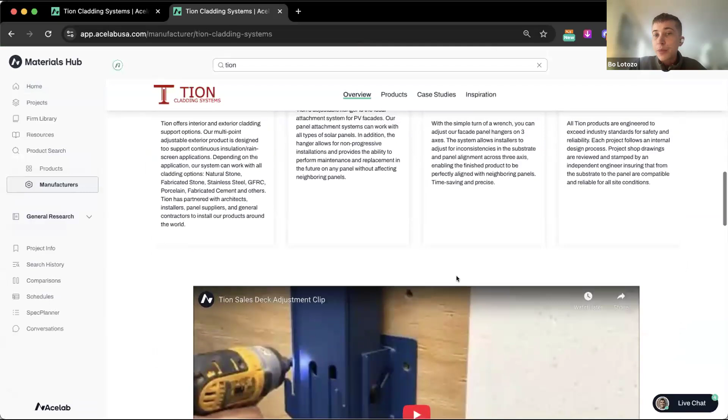You can get in touch with their team directly by clicking this contact button. You can scroll down to view some more information about their company, watch some installation videos, as well as view their products. You can save these to your firm library on Acelab, to any of your projects on Acelab, so that you can come back and reference that information later. And you can open up these product pages to access downloads, product literature, all of that good stuff.

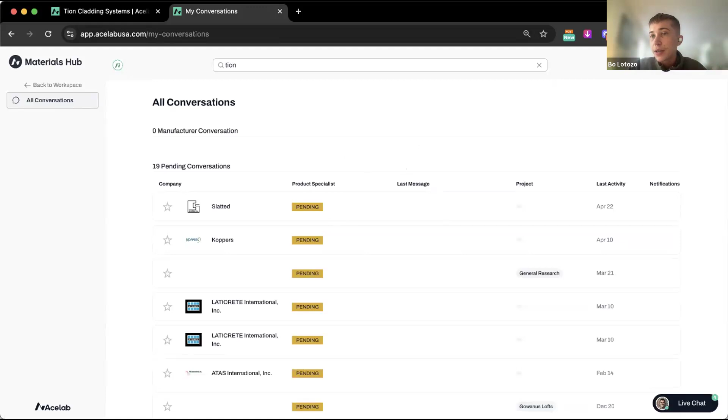You're also going to get an email about any new conversations that are started. You can navigate to this page directly from that email as well. But just in case you're logging into Acelab and want to take a look at an overview of all your conversations, this little button in the top right here is always going to take you to your conversation tab.

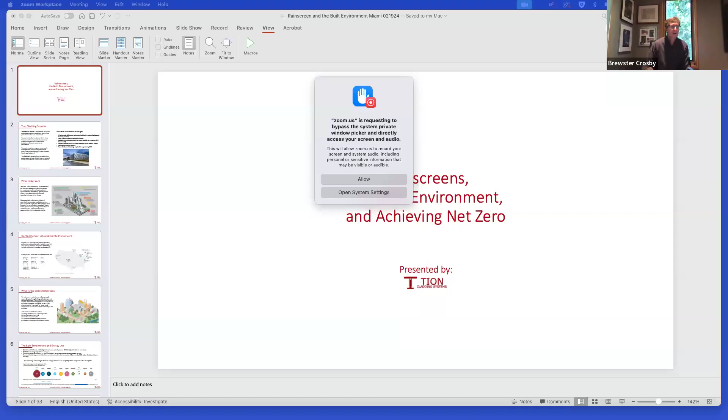All right. Let me know if you can see everything here. We can see everything. You might just want to pop it into presentation mode. Yeah, here we go.

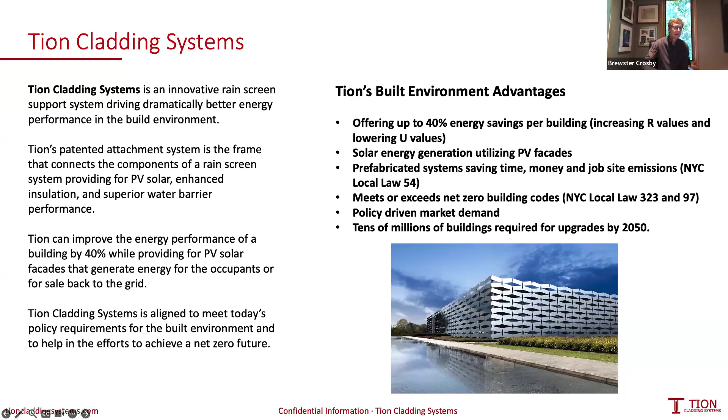So what is net zero? I'm sure by now almost everyone knows, but net zero is really the goal of balancing the inputs and outputs of our environment. In this particular instance, it's in the built environment - effectively getting our cities to be zero carbon and emit zero carbon. If it takes in carbon, we're trying to have offsets, so the net is actually zero carbon out into our environment.

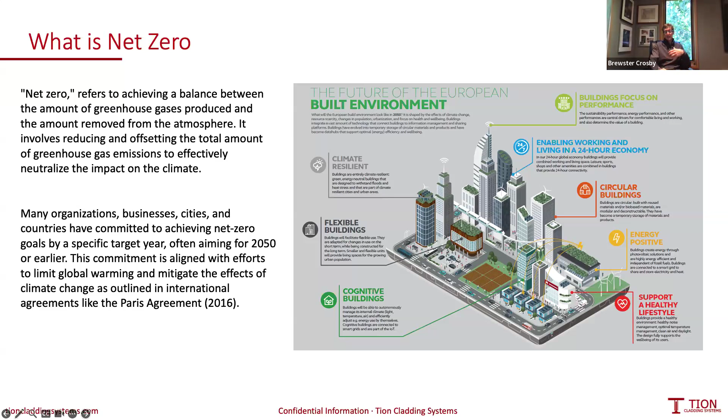Many organizations, building owners, cities, counties, states, countries have all signed on to this. It was really developed in 2016 as part of the Paris Agreement. The United States has been on and off again with this, but the good news is at the state level and at the city level, we're seeing really strong commitment from key cities and key leaders and key states in the United States.

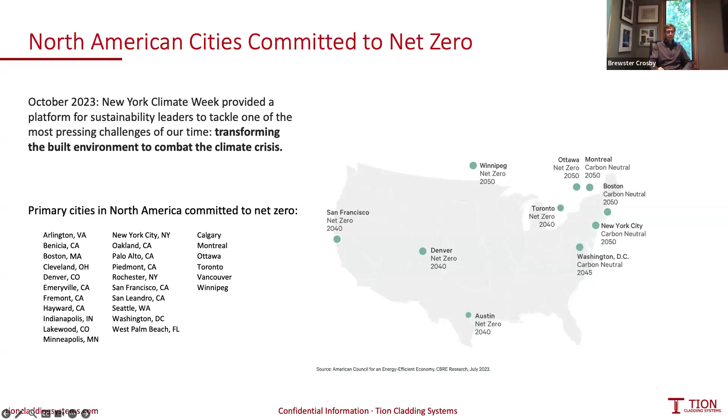Many of you probably already know what the built environment is, but achieving net zero in the built environment is saying we need our cities, our transportation, and all the surroundings that are quote unquote human made to achieve zero emissions. So factories, buildings, towers, parks, trains, planes, automobiles - all those are the built environment. And the net zero goals are trying to get all those to achieve zero emissions.

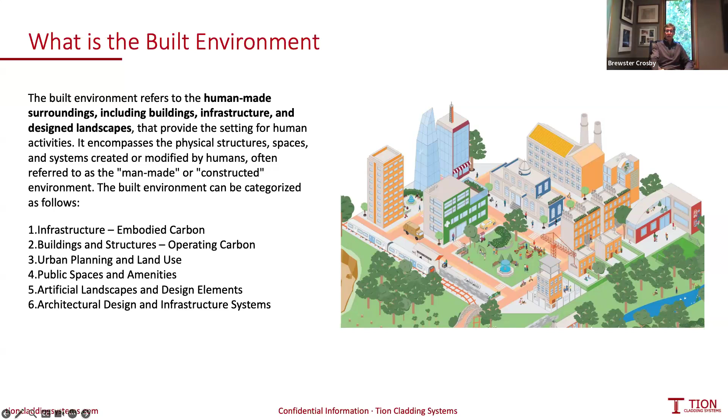So it's a colossal task across the spectrum, but also just within the cities and how it relates to buildings. If you look at just businesses, federal, state, and local governments, they own or use 93 billion square feet of real estate in the United States, and that's about 190 billion in energy expenditures a year. So we're talking a significant amount of volume and a significant expense in what our buildings use to function. It's about 35% of all energy consumed in the US, and about 16% of our emissions as a country on a whole. So the footprint of the built environment is actually pretty substantial when you think about all the outputs.

The interesting thing is when you actually look at how a building functions, a good hunk of it, about 40%, actually relates to the building envelope - that's the heating, the cooling, and the ventilation. These are all things that are relatively manageable in an existing building or a new building you create, just by products on the market today and retrofits.

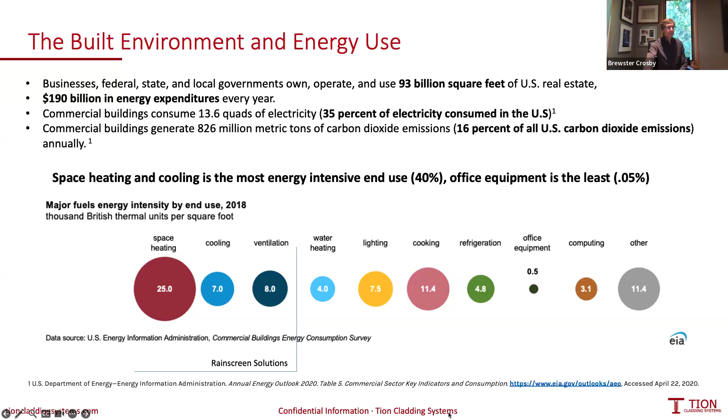So how do you achieve net zero in the built environment? There's a whole bunch of things people and cities and states can do. Of course, not everyone's going to do the entire list. People are going to mix and match for what makes sense for them, both for their part of the built environment.

Whether it's a building or a park, or their economics. The main thing, obviously, is to decarbonize the energy sources, shifting from coal and gas to cleaner energy sources like wind and solar. That is a big one. Part of the challenge there that cities are finding is that they don't have the footprint to do wind and solar within the city, so we're looking at ways to help cities actually generate electricity within their footprint.

Building efficiency, so updating your buildings and hitting new codes that have been implemented so that all the buildings, existing and future, are much more efficient. Sustainable transportation, we hear a lot about this, and many of us do this already, from biking and walking to using electric cars. All this helps reduce the carbon needed for us just to go about our daily lives.

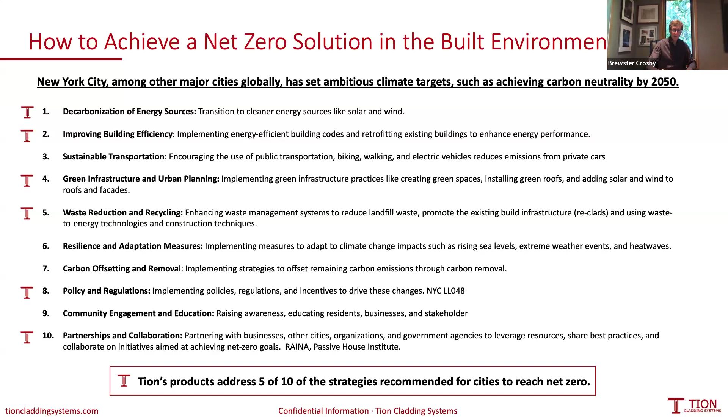And then, of course, partnerships and collaboration is very important across multiple agencies, cross-discipline in cities and governments, to other types of organizations like RAINA, which is the Rainscreen Association in North America, and the Passive House Institute. Organizations like this are really helping drive the conversation and provide the tools needed for people both on the design side and on the construction side to help achieve net zero goals.

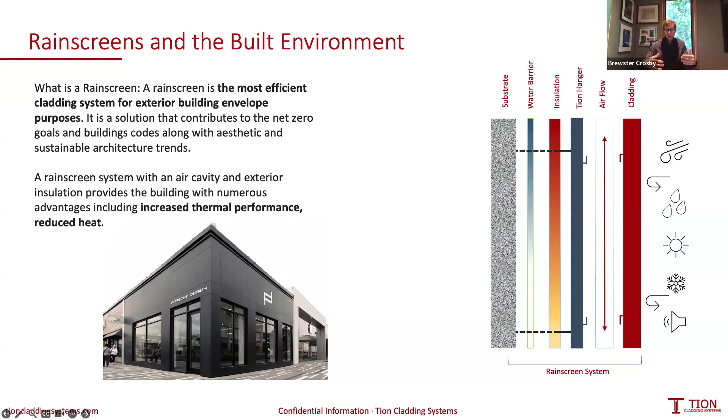Quickly, the rainscreen is probably the most efficient cladding system out there to help achieve better energy performance. It really increases both the warmth of the building, and also how air moves in and out or through the spaces of a building.

The components of a rainscreen are relatively simple. Of course, you have the substrate, which is the load-bearing frame, typically the side of a building. You have a water barrier that provides waterproofing, so no water can penetrate into the building. Insulation typically sits outside the water barrier, and then you have an attachment system.

The attachment system is actually relatively important. There's many different types of attachment systems. There's the typical lattice system that you would see, where you see verticals and horizontals. Tion actually uses more of a vertical system, which allows for more airflow to go through the air cavity

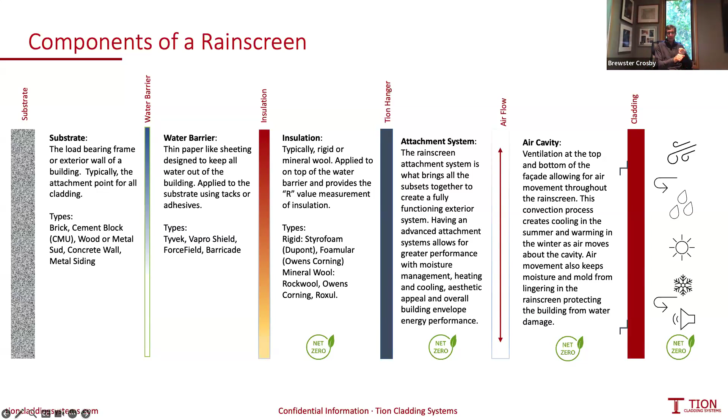that sits outside the attachment system before you get to the cladding system. This airflow is really important because it allows the exterior of the building to breathe, and hot air moves through the exterior envelope of the building and out, as opposed to trying to penetrate into the building. And it's the reverse in winter. And then, of course, you get the benefits of your exterior cladding, which provides all the environmental benefits and protections to your building, along with noise and other features.

The advantages of a rainscreen, really, if you think about wearing a down coat like many of us do, is an increased R value and U value. The R value is effectively putting more feathers into your coat to keep your building more warm. The U value is having a stronger exterior shell, the nylon shell, to keep the weather from penetrating into your body. And so a really good rainscreen is going to increase your insulation and decrease the ability for wind and other factors to penetrate the building.

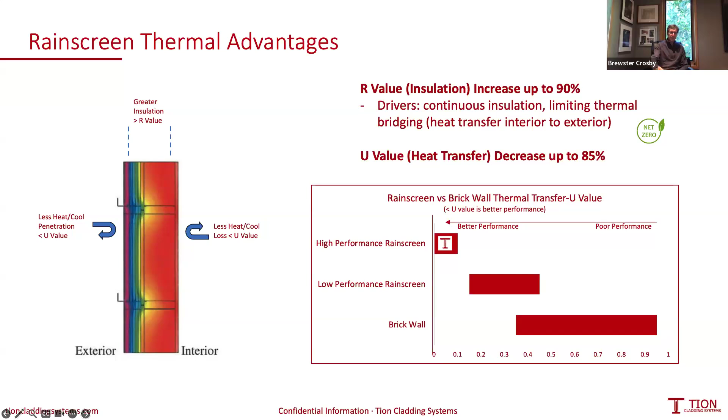So you get the benefits of both energy efficiencies in a building with a strong rainscreen.

But the savings are real. If you can save 30 to 40% on an energy bill through your upgrades, it's pretty substantial for a building owner.

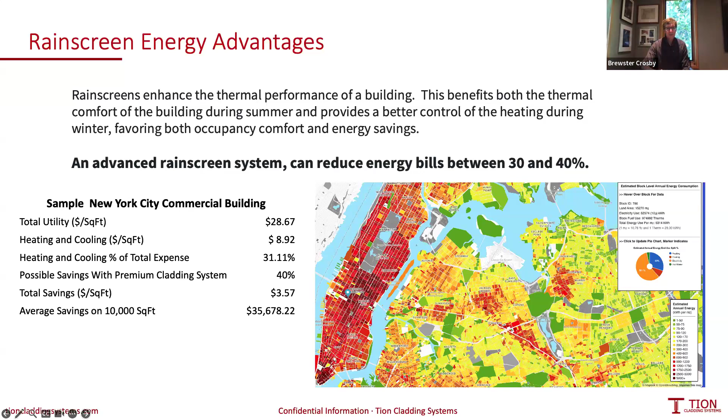The other nice thing about a rainscreen and cladding is it allows, from a design perspective, to add color, add texture, do quite a bit of fun design things to really freshen up a building or create new design features. We're seeing so much advancement on the panel side, the cladding side of facades, both in the materials that are now available, the colors that are available, the ability to really have strong UV performance, strong rain and environmental performance is increasing all the time, and it's just fascinating to see how advanced a lot of these panel companies are getting with the materials they're able to provide.

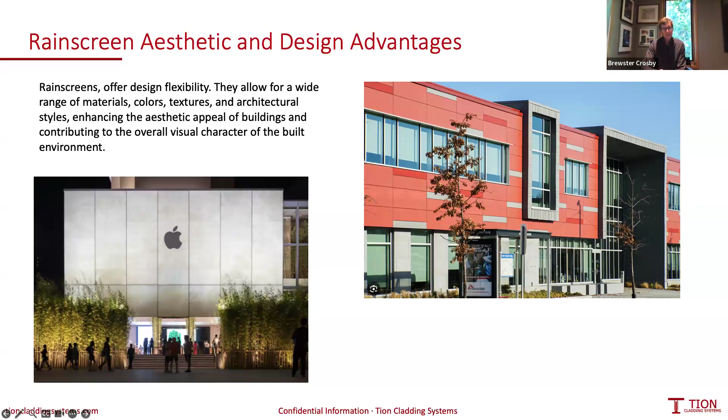I touched on it a little bit earlier about the importance of actually reusing existing buildings, because if you look at an existing building, there is all that captured carbon in there already. If you tear it down, you lose all that, and you have to create a bunch of more carbon to build something new. And so what we see here is, just by simply recladding a building and putting a rainscreen

on the exterior, in this case of a brick building, you can get all those benefits of a cladding system, of a rainscreen system. So you're going to see your R value goes up. You're going to see your U values go down. You're going to see better waterproofing.

The other ways people are really focused on upgrading their buildings, obviously, are the other heat loss areas, which are the windows and doors. And then they're upgrading their HVAC systems too to provide more efficiency in the interior circulation of a building. But really, for a square foot perspective, a reclad is one of the best ways to update your building.

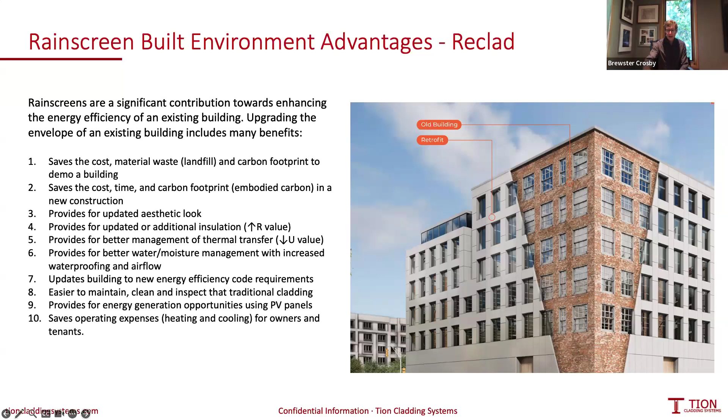We see this more and more in Europe, and it's starting to happen a little bit more in the US, where people are experimenting, and Tion is doing this as well, with putting solar panels on the side of a building as the cladding component. And the really interesting thing about this approach is, one, you get all the energy saving benefits of a rainscreen, so 30-40% savings to the building, but then you also get energy generation.

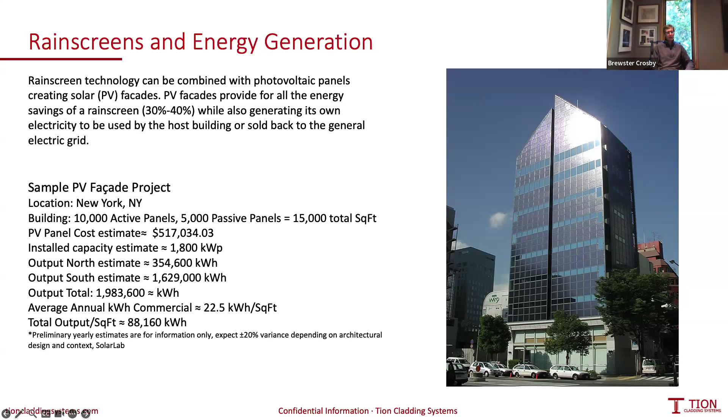And so that allows both the building owner to have a revenue stream, but also if you look at the footprint of a city, suddenly you have more real estate and more vertical aspect to generate renewables, as opposed to pulling carbon energy from faraway sources, whether that's coal or gas or what have you.

The cities around North America are really focused on this. New York has been one of the leading cities on the drive towards net zero. Their goal is to do it by 2050, which tends to be about what most cities are driving towards. But the task is huge.

So New York has set a series of laws in place to both use a carrot and stick approach with their building owners. They're giving them time to update their buildings, but if they don't, they have to start to pay more, and the fines they end up paying will increase each year they're late, until 2050. But if you just look at New York alone, there's over 1 million buildings that need to be upgraded or retrofitted.

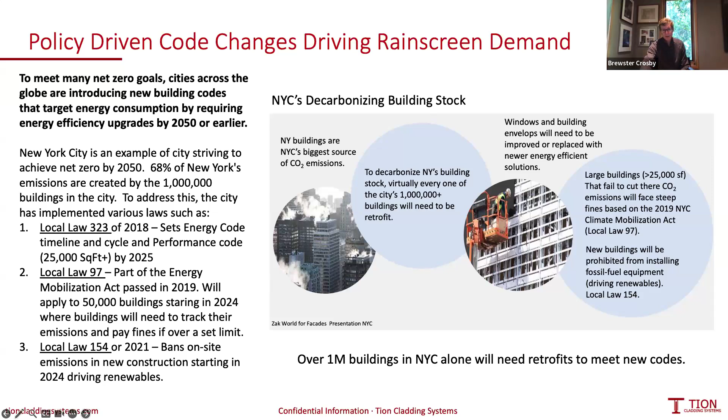As I touched on, you can do this through a whole host of ways. Updating windows and doors is important. Updating your HVAC system is important, but also doing a rewrap and updating your facade will really help you achieve those goals. New York really is a leader here, but Boston's followed, Chicago's followed, a lot of West Coast cities have followed, and all the way into Canada. So we're really talking millions upon millions of buildings that need the support to achieve these goals.

So in closing on the net zero side, and passing over to Ben to talk a little more about Tion, what a high-end rainscreen system does, such as Tion's system, is really connect all the dots. Tion works with all substrates. We're designed to have minimum water penetrations to keep waterproofing of a building as strong and as good as it can be. Most systems work with various depths of insulation. Tion will go out to 12 inches of exterior insulation, which is needed in parts of Canada and even parts of the US.

We can span deck to deck too. A lot of systems go from stud to stud. Our system does that, but we can also go deck to deck in 10 to 12 foot spans, which is helpful for some reclads depending on the building and how it's been structured from years ago.

We manufacture everything off site. So our product shows up in one piece, designed for a specific location on the building, designed for a specific panel to match up with. And that really saves a lot of the carbon intensive part of a job site. If you think about it, every day someone has to drive to the job site. If you think about all the time someone goes up and down on a lift to put in a lattice system, all that is creating carbon, and that's part of the carbon cost of doing a building. So if you're able to reduce that by sending completed products to the job site, you're actually lowering the carbon inputs into both a reclad and a new build.

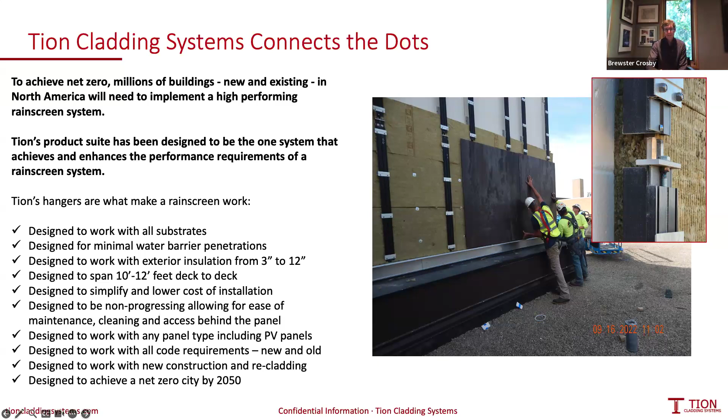Let's see here, you guys see my screen okay? Yep, yep, good. Awesome.

So a little background on Tion, kind of where we came from, how we got to where we are today. We really started out of a relationship with Apple years ago, working on a lot of their stores around the world. They were primarily utilizing GFRC and quartz panels on a lot of their interior and exterior cladding. What they were utilizing was, like still a lot of people out there today, some sort of a cleat or Z-clip or French cleat on the back of the panel. Then there's something on the wall corresponding, and you put the panel on.

If it's not right, you take it off, you shim it, you mess with it, and it can take a while. So what we came up with was a way to actually adjust those panels up, down, in, out, any which way you want while they're on the wall. Not only does that significantly cut into the installation timeline, but it also allows for perfection with the aesthetic appeal of the finished product.

So your joints are perfect, your panels are all perfectly in line. And I think from an architectural standpoint, it's obviously the desired effect, right? You want everything to look perfect, like you drew it up on the computer. So that's kind of where we came from, and I'll get into a little bit more of the specifics here.

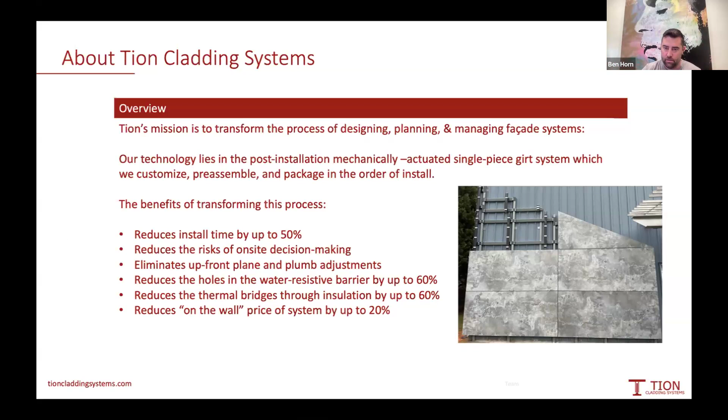But there's several other ancillary benefits of our system too, with regard to the fact that we can space our hangers out so far. There's fewer penetrations through other kind of weather barrier, and our thermal performance is much better. So yeah, there's several reasons as to why, from a design standpoint, our system makes a heck of a lot of sense.

So just kind of showing you what our system looks like, right? I'll dive into this more, but really what you see here on the right is what we call our T hanger, which I would say we probably use 90% of the time on projects. It's several extrusions that we assemble, customized to the panel geometry of the project, and I'll get into a little bit how we determine some of that in a second.

But basically, like I said before, this comes as one piece. So you can see these are mounting brackets that attach to the substrate, and then this is the body of the hanger. In this case, we really just have some simple Z-clips, and I'll show you, there's several different attachment methods.

We can work with just about any type of panel and engineer any kind of connection to it. On the left here, you see this is our steel hanger, and we use this for relatively heavy panels. This aluminum hanger here is rated for about 850 pounds, so with two of them with a panel, you're looking at almost 2,000 pounds typically. And this steel one is in excess of several thousand pounds. So there are some cases where this comes in handy, and I'll show you an example of that.

But back to the attachment methods, there's several different kinds, and a really basic kind, depending again on the panel we're working with, is some sort of undercut anchor. These are Keil anchors, and basically they just get drilled anchor holes into the back of the panel, and then you can attach some sort of a real basic Z-clip or some other type of extrusion that then would marry up to this clip on the front of our hanger.

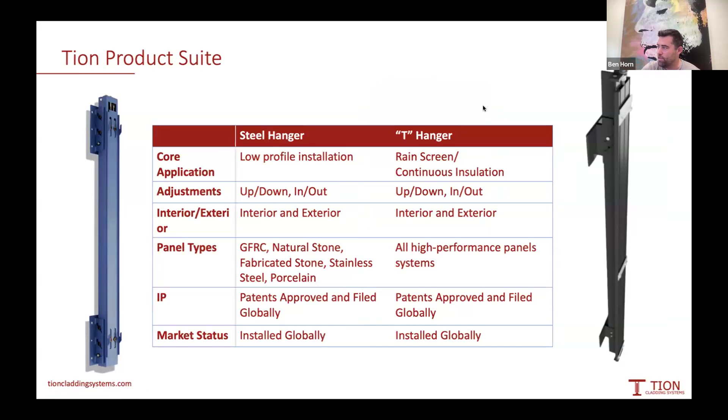And again, we do all of the coordination with the panel manufacturer. So when the installer receives our hangers, these clips are exactly where they need to be to line up perfectly to these clips on the back of the panel.

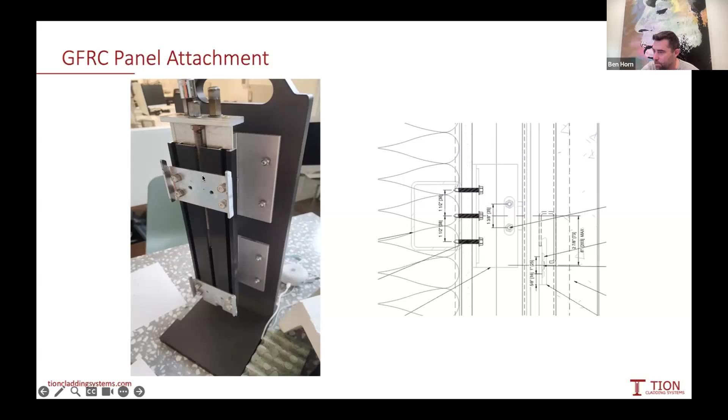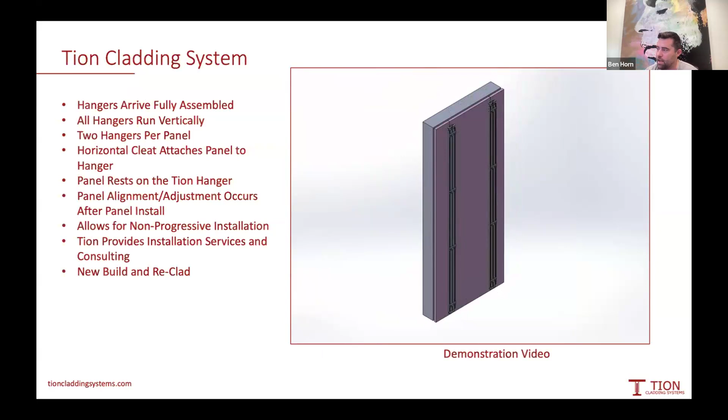So this is another, more robust attachment. This is just an animation showing what that installation looks like. You have the panel or hanger attaching to whatever the substrate may be - it doesn't matter, could be CMU, stud walls, whatever. Then that pink stuff coming in would be your continuous insulation if necessary. Then you have the panel with clips on the back that just engage with the clips on the front of the hanger. It's that simple - a really basic animation of what a large format panel installation looks like.

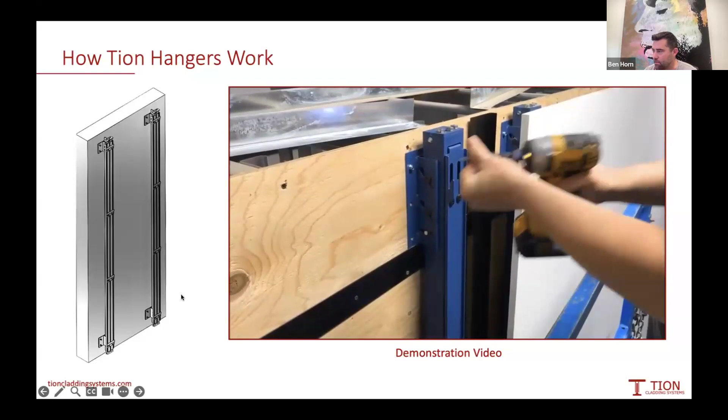To show you the adjustment capabilities, this is a mock-up we did with Apple years back, showcasing some quartz panels for them using our steel hanger. We use this hanger on a much bigger panel I'll show you in just a second, but in this case, just attaching directly. Then we have our adjustment bolts on top of the hanger.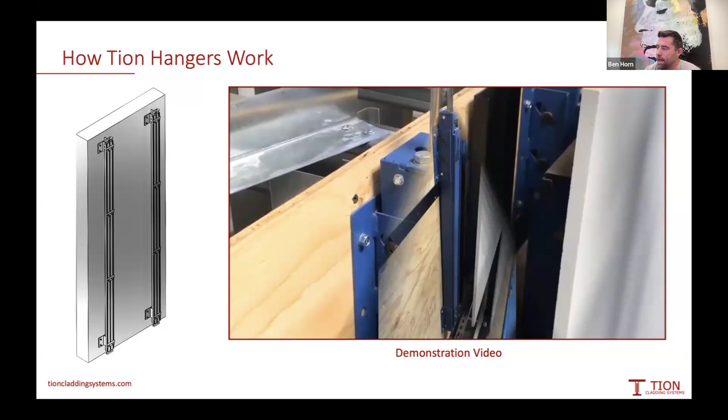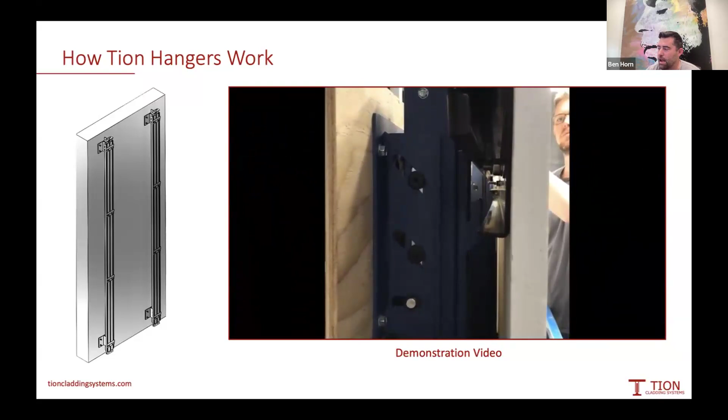By turning that bolt right there, you can see the entire hanger moves in and out at the top. The middle adjustment bolt raises that entire hook plate up and down. You can see we're using laser cut hooks as opposed to a Z-clip, for example. The adjustment bolt on the left, zoomed out, moves that entire hanger in and out at the bottom. So again, you never have to take the panel off to shim or mess with it in any way. All the adjustment is located at the top of the hanger, and the panel just sits on those hooks - you can see how easy it is to adjust.

Obviously in the real world, nothing is ever perfect with regard to framing, especially if a building is being refurbished or reclad - things settle, things get out of whack. It's really hard for the installer to achieve perfection with panel alignment. So our system has built-in adjustment to really work with any inconsistencies in the wall. It's an installer's dream, and from an aesthetic standpoint, it can fix a lot of issues.

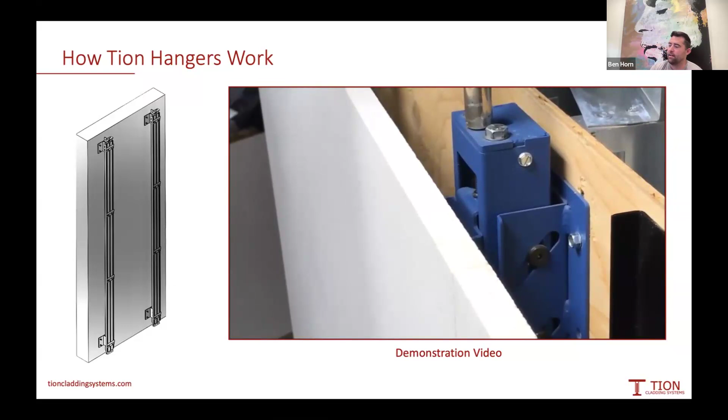Just to touch on exactly how perfect we can get things - this is the biggest Apple store in the world, in Dubai, at the base of the Burj Khalifa at the Mall of Dubai. If you're ever there, go check it out, it's a pretty amazing building. Just to give you a sense of scale, these are people, and you've got about 40-foot tall sunshades that rotate with the sun.

The entire interior and exterior of the store have GFRC panels supported with our hangers, which you can see in blue. You have an upper level and a lower level, and two stairwells on either side. This picture shows stairs, a little landing, and then you go left up the stairs to the second level. In this case we're just attached to Unistrut, a fairly simple way to deal with it. These hangers are about 18 to 20 feet tall, and you can see the panels here - these are several thousand pounds.

There's tube steel all in the back to support the actual panel, and what they did was pour the actual handrail into the panel. So you can see these are all individual panels with visible joint lines. This is a shot looking down one of those stairwells - an intersection of 4 of those panels. The tolerances we had on this project for the joints were 3 millimeters.

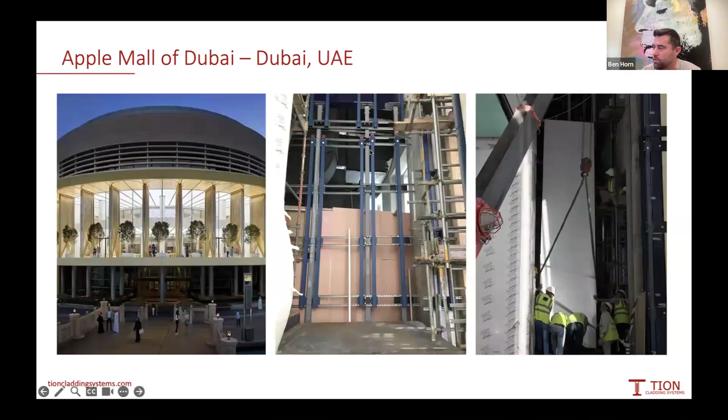We had a guy from Apple, from Italy, show up with a piece of blue plastic, and he checked every single joint line around the entire store. He would say, this panel's got to go up half a millimeter, because if that's not perfect on your hand, you're going to feel it. And we had the ability to get back behind the wall, since it was open in this case, and adjust those panels to those conditions - it's pretty amazing.

I don't know of any other system in the world that can do that, but if you do, let me know, and I'll have my lawyers reach out, because all this IP is wrapped up pretty tight. So the adjustment capabilities of our system are pretty slick.

One thing I want to show you here—I don't know everyone's depth of knowledge regarding the actual installation process. This video we made, I'll blow through it a little bit, but basically what we did is take another system, a more traditional clip and rail system, and installed two 5-foot by 5-foot panels on it. We did the same thing with our system, and wanted to showcase the difference in time.

Basically what you're doing is building that out on the wall. This is the system on the left, the competitor system with your clip and rail system, and then we have our hangers here. These are 10-foot hangers, again two 5-foot by 5-foot panels, so we're able to put both those panels on the same set of hangers.

So basically what you're looking at—I'm not sure I'm seeing, yep. Sorry, let's see here. I'm not great with this, here we go. Sorry, zoom—I'm normally a Teams guy. Okay sorry, here we go. How's that? That's great, we got you. Okay, sorry about that guys.

So basically, let me go back here. This on the left is what you build out with your clip and rail, competitor system. And this on the right is our system. Again, the two vertical hangers, 10 feet tall, two 5-foot by 5-foot panels on each set. So basically, as an installer, what you get here in the foreground from a competitor is a box full of components.

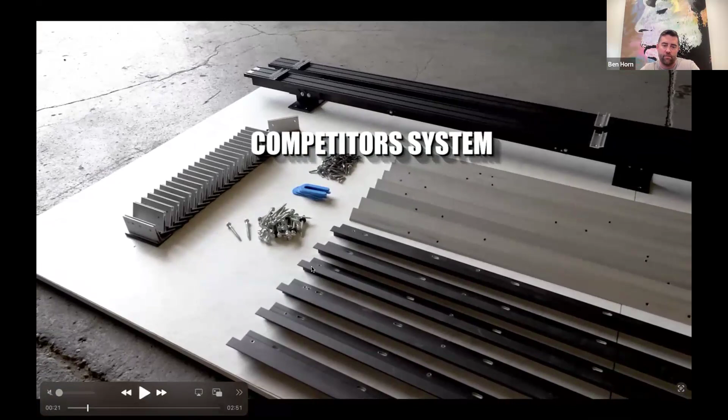You got your clips, your horizontals, your verticals, your shims, your fasteners, and you essentially go construct that on the wall like a Lego set almost, right? Our system, in the background, comes fully assembled, ready to go. Literally all you're doing is pulling that hanger out of the crate and attaching it to the wall per our shop drawings. If you look at the left here, you have 38 individual pieces that you have to cut, measure, and build out on the wall.

You have 72 anchors, there's shimming, you got to get everything plumbed out. Our system, there's two things—you can see here 3 mounting brackets, 1, 2, 3. Once we hit about 8 feet, we add a third mounting bracket in there on our hangers for engineering purposes. Typically there's 4 fasteners per mounting bracket, so you can see there's a third the amount of mounting brackets. Again, no shimming, no cutting or anything like that.

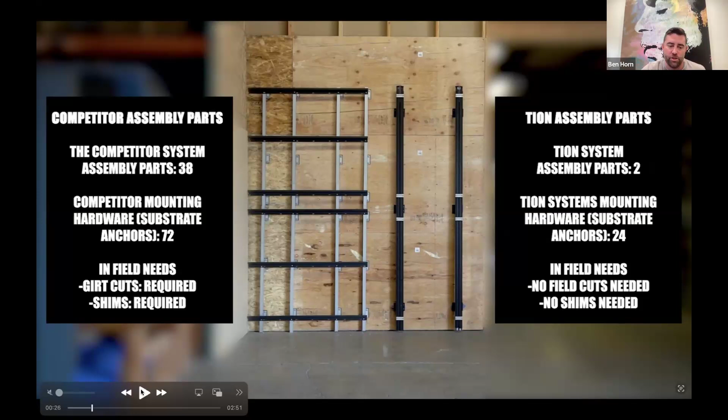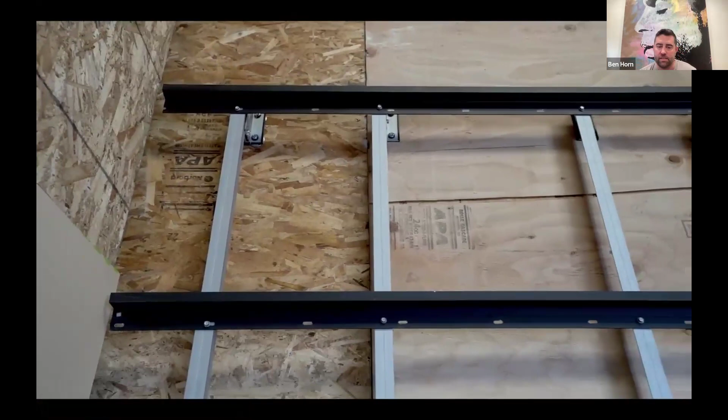And again, obviously with the panels, depending on the panel, there's a lot of potential stuff on the back of the panel that has to go on to marry up to whatever system you're working with. So this just kind of shows the sequence here of really the process of installing this stuff.

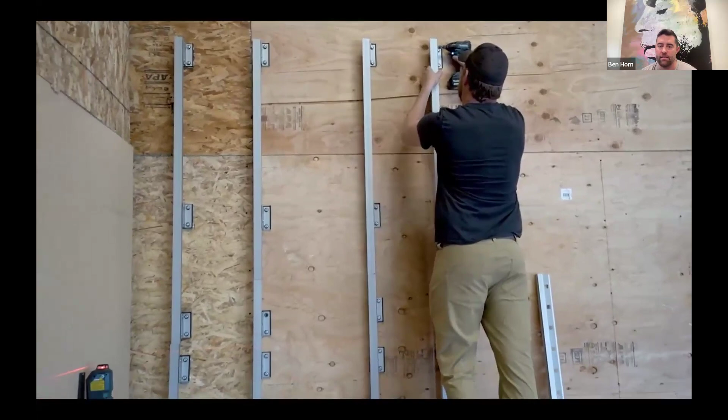If you've never experienced the actual installation side of things, it's a very labor-intensive, tedious process. These gentlemen in this video have worked with both systems, so it's not like me up there fooling around—they know what they're doing.

But it just goes to show the amount of labor it takes, and this is 50 square feet, right? So when you're thinking about a large project, it's not really that much square footage, but there's a lot to it. At the end of the day, it took them 151 minutes to put those 2 panels up on the wall with the competitor system. And fast forward here a little bit, but basically doing the same thing with our system.

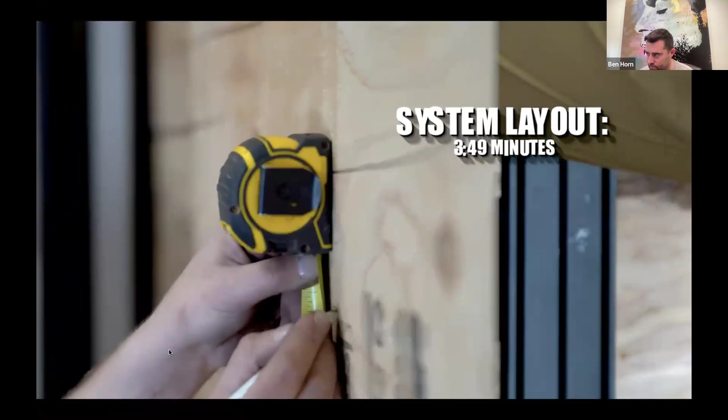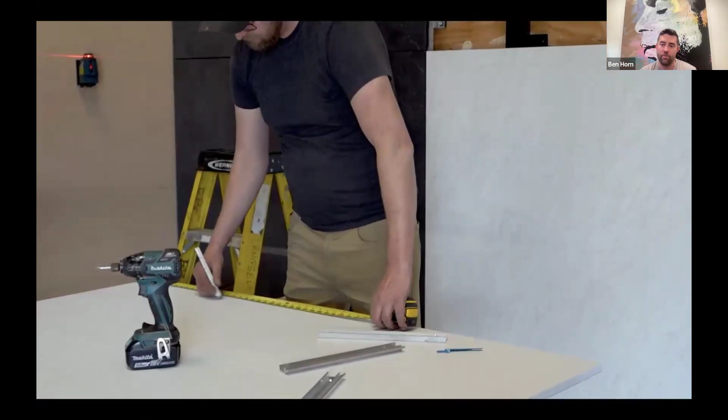What we've done by sending everything already assembled is take a lot of the guesswork out for the installers and reduce the ability for them to make some sort of mistake putting everything together. So everything is in the right place, the adjustment capabilities are built in. All they really have to do is attach the hangers and then drop the panels on, and if there's adjustment needed, it's all built into the product.

So that took 35 minutes, right? So you got the comparison there of 151 minutes versus 35 minutes. And the one thing I'll bring your attention to—21 minutes of our 35, in this case, was just attaching those anchors and the cleats to the back of the panel. A lot of times there are no anchors or cleats to even attach to the back of the panel, so you can see how much drastically faster that would make it.

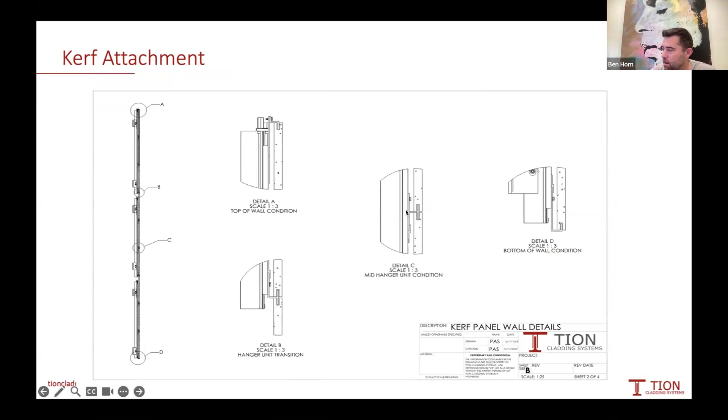So what we have here are the hangers attached to the wall. You get plumbed out, then you come in and attach this bottom J, right here. Then you apply the stone, and come down and secure it with your dovetail clip here. Then you work on the course above you, like this. Finished product looks like this.

In this comparison, the installer, and I've worked with several installers and checked these numbers, and they're all pretty consistent, were factoring in about 100 square feet of subframing system per two-man crew per workday. That's using the other type of clip and rail system. Our system, they're probably going to be doing about 1,500 square feet a day.

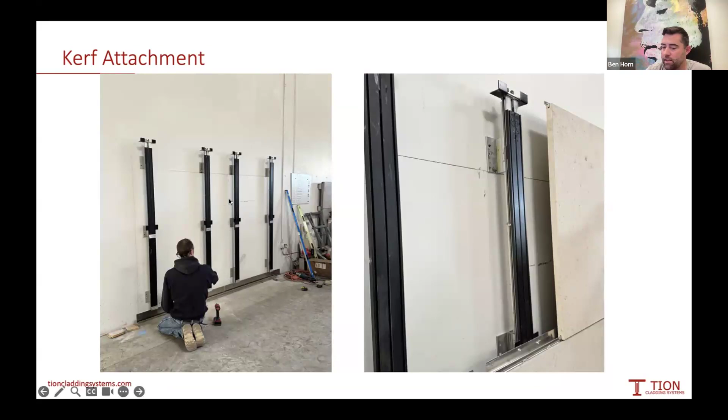This whole wall took them less than an hour. They were factoring in again 100 square feet a day with a two-man crew for the subframing system, and 150 square feet of stone with a three-man crew coming back on top of it. They're probably going to be doing close to 750 square feet of stone with our system with that same two-man crew. They don't even have to get another crew.

So you can imagine, especially in a place like New York, Chicago, or LA, where the union wages are high, it's really startling how much money they're able to save in efficiency with our system.

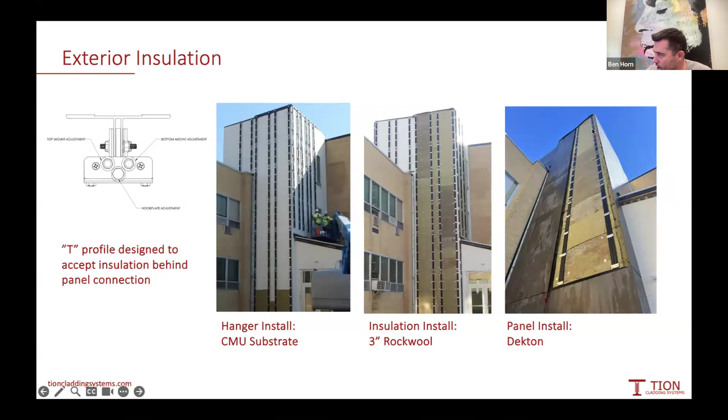So if we're dealing with large format panels, like in this example, it's pretty straightforward. You got 2 hangers, you got your panel, you drop it on, you're good to go.

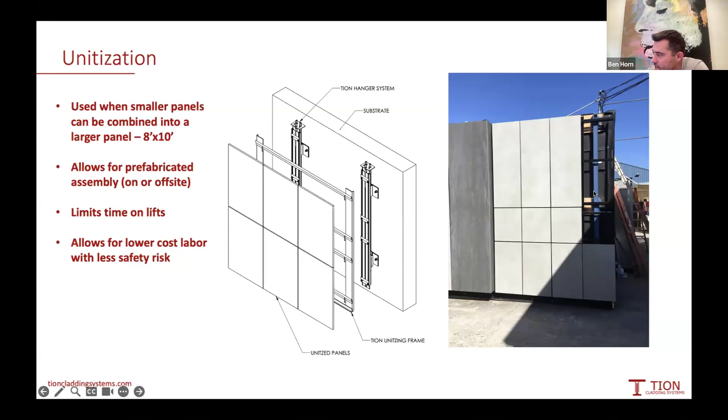So this is a mock-up we did. You can see there's a hanger here, another hanger over here, and we left these panels off so you can kind of see through it. But there's the black frame. Again, the installer attaches these to the frame and then flies that up as one section.

It's a fairly regular job for us where it's a reclad of an existing building that's 30 years old, had tile falling off of it, didn't look great. So the vertical hangers here, those are our hangers, and that's all there is attached to the exterior. All that horizontal lines are existing facade features.

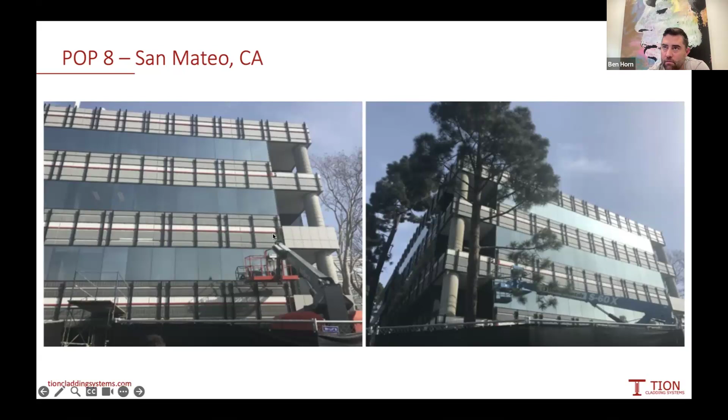So you can see in this case, there's scaffolding and buckets, and your productivity as an installer goes down even further. They had originally estimated using a regular system about 66 days, and they ended up doing it in 16 days with our system.

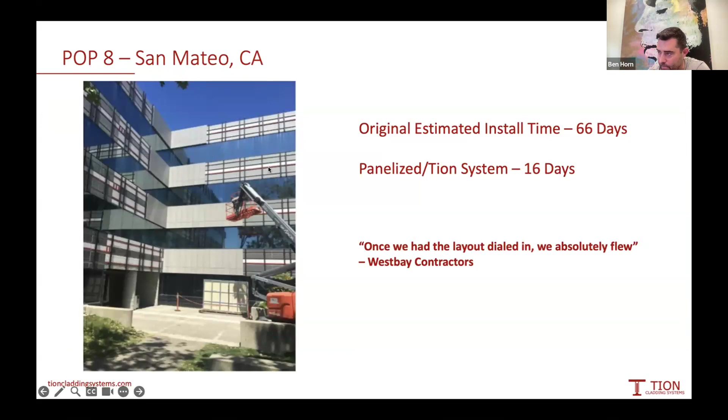So you got, again, sections like this that you're throwing up as opposed to individual panels. If you go back to that video I showed you and all those other components you have to have - clips, verticals, all that - it would take a long time to get that subframing up prior to even putting up the individual pieces. And then that's what it came out looking like.

So just a couple more examples of projects. This is, again, the Golden State Warriors Arena Chase Center. These are all panelized sections as you go around the entire exterior of the building.

One of the things we do really well with is staging and coordination with the installer to make sure that in a situation like this, all the panels arrive in the perfect order and you're not running around the site, because there's not a lot of room, looking for things. Being able to deal with deliveries and all that coordination with the installer, we do really well with as well.

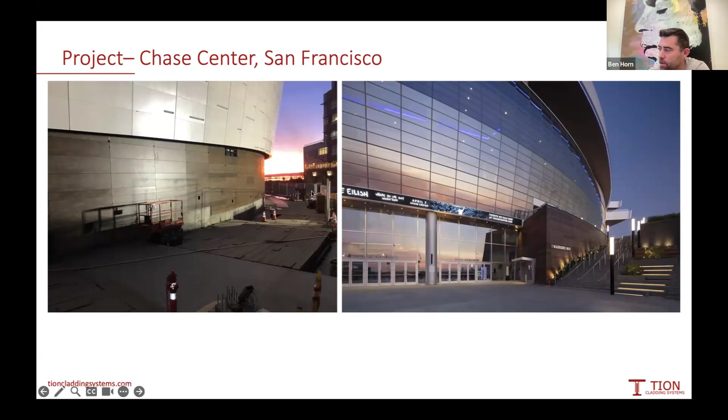So some more examples of exteriors. This is a reclad in Denver. It had this kind of old, ugly, corrugated concrete look, and they gave it a facelift. Really cool light feature the architect put in here. Came out looking really fantastic.

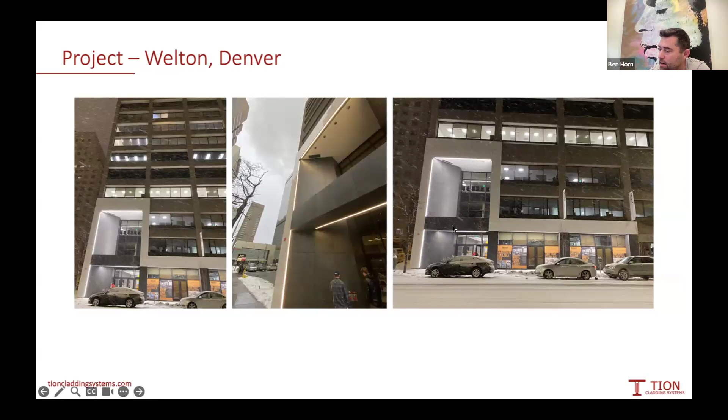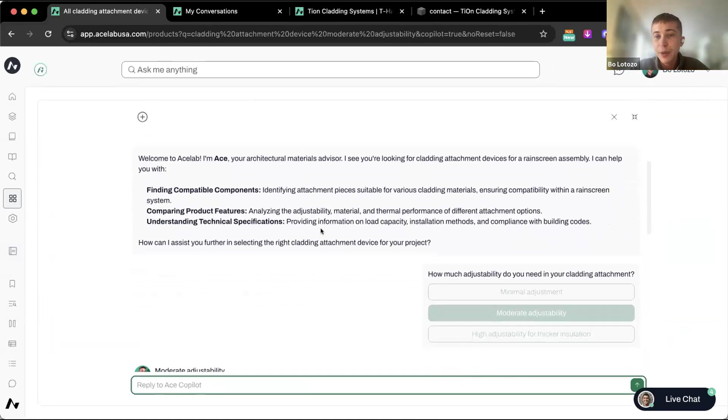Our Copilot responded back and asked me how much adjustability I would need. I said moderate adjustability. Then the Copilot updates the search results and highlights a few key products. We've got both of Tion's products that showed up here, along with some other options from Monarch as well. You can just continue with this search to continuously narrow down your product choices.

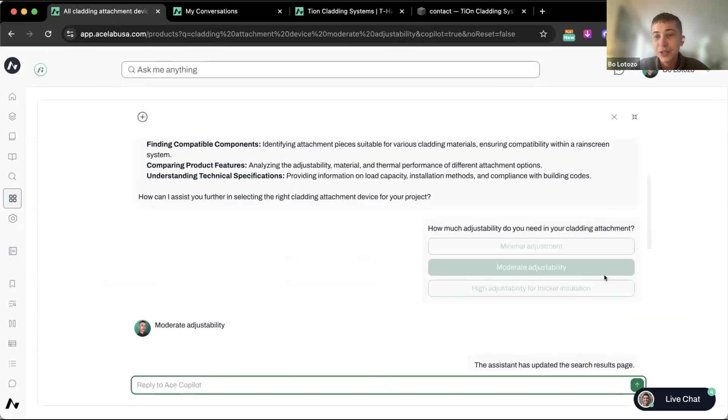So I just wanted to give y'all a quick preview of how this works. I think it's a pretty cool tool, really helpful to help you identify and make sure you're asking the right questions when it comes to your product research. Definitely recommend everybody take some time to play around with that after today's call.

That is pretty cool. Yeah, it's awesome, we're really excited about it. It actually got released earlier than we planned, so we had it just in time for the AIA conference last week. Got to try it out live with some architects there, which was really fun.